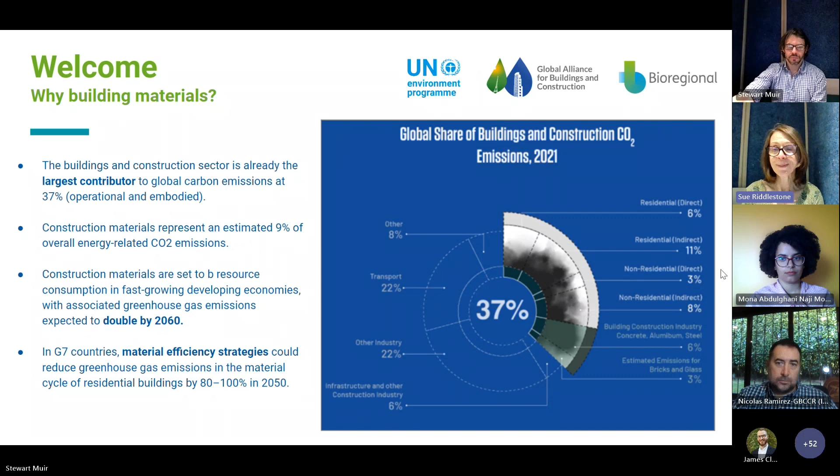Next slide, please. We have all been doing a brilliant job at tackling operational carbon emissions - that's the energy we use to heat and light our buildings - but we haven't addressed embodied emissions of materials fast enough. You can see this chart here from the Yale study - and Yale have been partners in this initiative - which shows 2021 on the left-hand side, and then by 2050 you can see that the embodied carbon of the materials, if we carry on as we are, will make up a much larger proportion of the carbon emissions of the buildings and building sector.

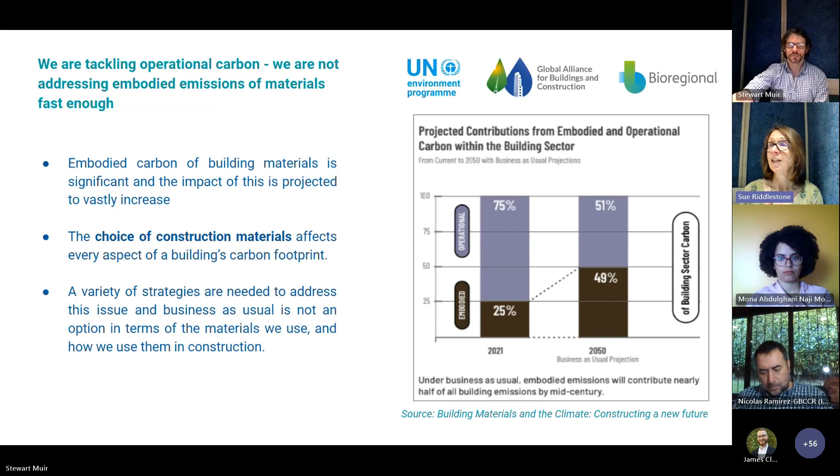So this is something we urgently need to take action on, because the choice of construction materials affects every aspect of the building's carbon footprint. But we also need to think about resource consumption. You can see from this chart here from the OECD that construction materials dominate resource consumption.

You can see at the top there, sand, gravel and crushed rock, the steel, the metals we use to build our buildings, limestone in terms of that's needed to make cement, wood. So you can see that the construction industry - and if you think about it, if you look around you as we go about our days - basically, yeah, it's buildings, it's where all the material is. So this is really a very, very important issue.

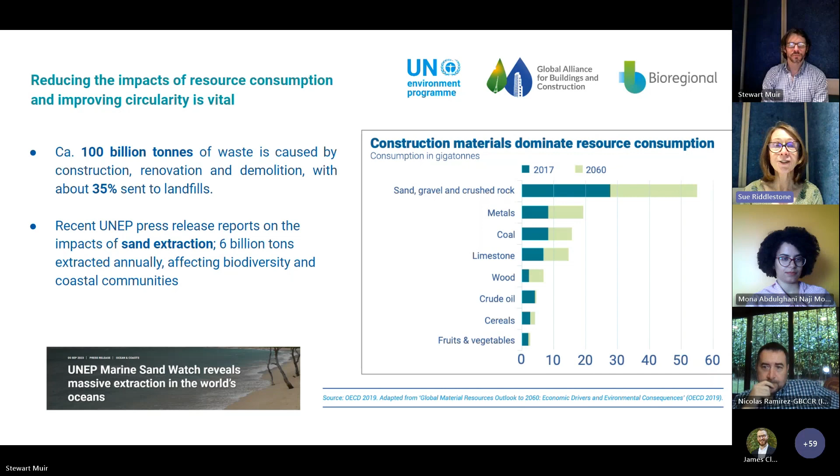And so we're delighted to welcome you all here today to talk about this, because - next slide, please - this is a challenge for policymakers, and the hub is very much dedicated to providing solutions for policymakers. So 50% of the buildings that will be standing in 2060 have not yet been built. So this is a fantastic opportunity to do it better, to improve the circularity in terms of resource use in the buildings, the embodied impact of the carbon.

And you can see from this chart here how what we need is to reduce the high embodied non-renewable materials, in grey there, in terms of building materials, and grow more use of timber, recycled materials and bio-based materials.

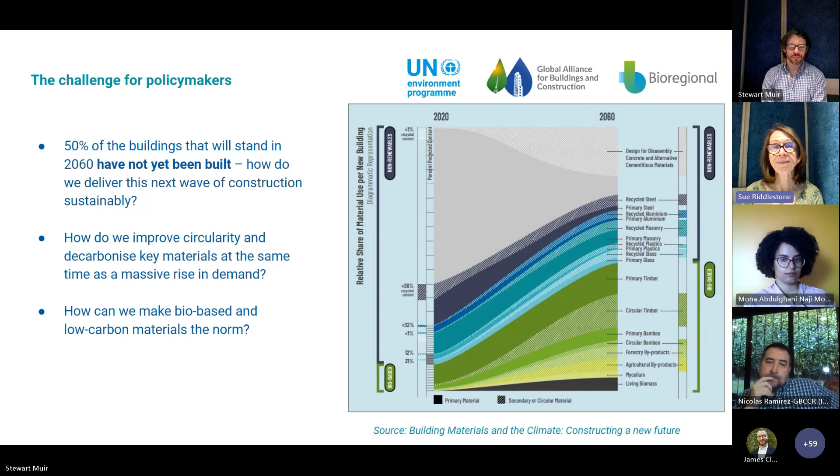So I'm delighted, having told you all about the imperative there, to hand over to Mona Mohammed from United Nations Environment Programme, who is the Programme Manager of the Life Cycle Initiative based in Paris, France. She has been chair of the Materials Working Group on this project. Mona works on increasing access to life cycle assessment data and knowledge, and works closely with the building, construction and mining sectors. Mona's background is in environmental engineering and women and gender studies. Before joining the UN, Mona worked as a WASH advisor - water and sanitation - supporting the humanitarian response in Yemen and Sudan. So over to you, Mona, to share with us a little bit more about the background to the hub and its purpose.

Thank you. Thank you, Sue.

Really happy to be here today and to finally be launching the Materials Hub, which has been long in the making. So really glad to see quite a lot of people here from the GlobalABC and from the Materials Working Group, and I'm just thrilled that we're finally here today.

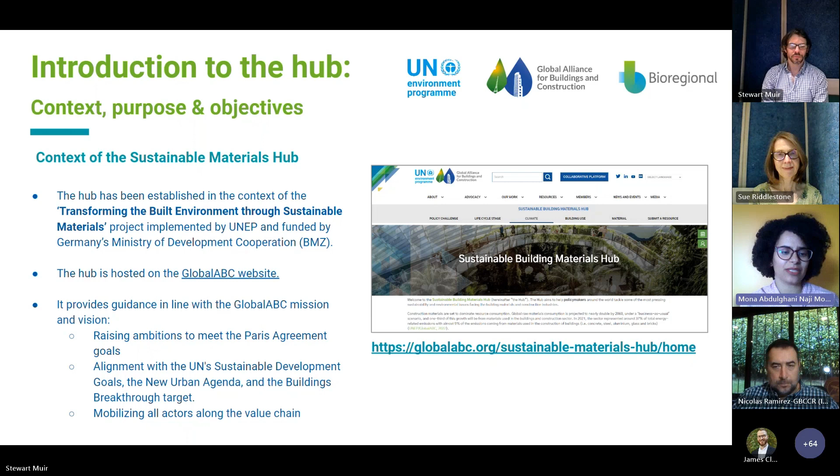We recognize that we have a lot of partners across the globe who work on this and put in a lot of work and resources. The idea was to bring all of that together into one platform where different users, and specifically policymakers, are able to come and access these resources. This is in line with the GlobalABC's mission and meeting the Paris Agreement goals, and finally the alignment on the UN Sustainable Development Goals.

The primary target audience here are policymakers, but we do work with everybody along the value chain of buildings and construction. So we have resources also for academia, civil society, private sector, etc.

The hub really is looking at different geographical contexts, and so we've tried to categorize the different resources by different geographical locations, as well as making sure that we're bringing everybody together - we're not reinventing the wheel. The main background pages of the hub, as well as the different pages of the hub, have built a lot on the text that has been developed by colleagues in the Yale Center for Ecosystems in Architecture.

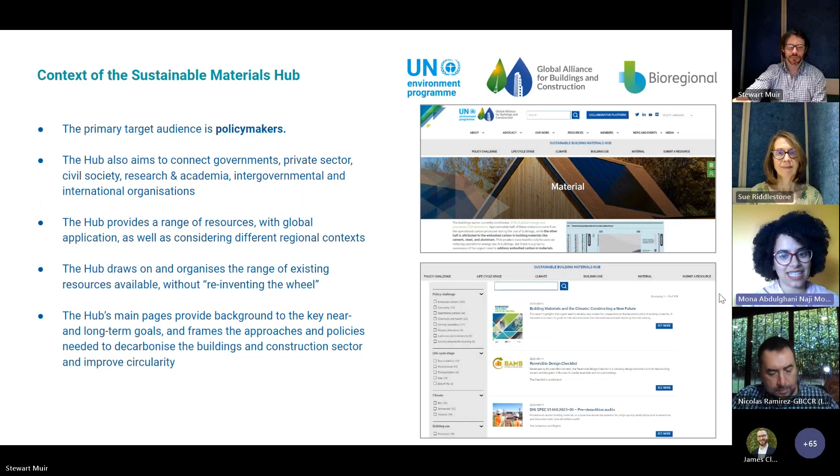A lot of the work we did, a lot of the language on the hub, actually comes from this materials report, which was launched yesterday. This report looked at the state of play all over the world, but especially focused on the 4 countries mentioned previously, with deep dive case studies. It really focused on the state of play for the climate and resource consumption impacts of buildings and construction. From there, the report also looked at setting out a roadmap for decarbonization profiles by looking at different building materials and what the transition to new materials might look like.

I really like the slide and the graph that Sue used, because it has an image of where we start today in terms of the mix of different materials we use in buildings and construction, and where we should be in 2060 if we want to continue to decarbonize the sector.

The report also looked at different profiles of technological advances and new business models for the buildings and construction sector, as well as introducing emerging tools for data analysis and decision making. So all of this was quite useful for the Materials Hub and for us as background material as we were putting together the information in the Materials Hub.

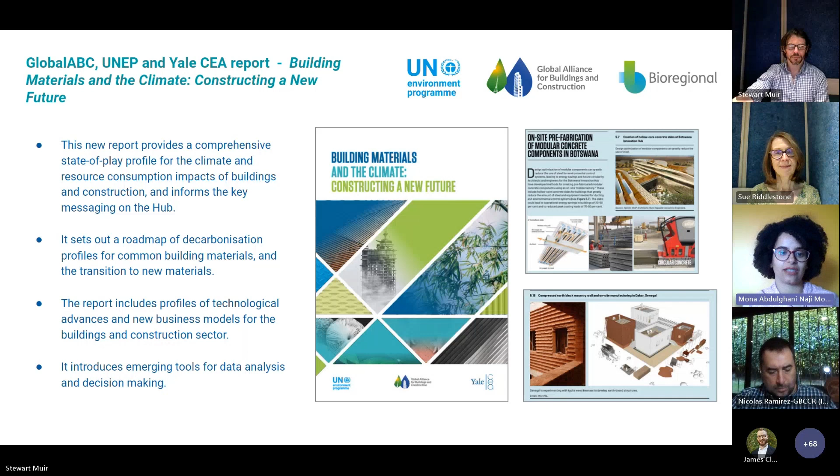On the next slide, we'll take a deeper dive into maybe 2 key messages from the report, as well as 2 objectives of the Sustainable Materials Hub. First, the hub promotes a whole life cycle approach, which was also quite an important key message in the report, where the impacts of material choices on human health and well-being, climate and ecosystems have to be considered before these materials are even extracted, and then again at each phase of the building life cycle, from extraction to processing, installation, use, and demolition.

And then for all of this, it's really important to have access to reliable information, verification, and coordination across the different stakeholders in the sector. That would include manufacturers, architects, engineers, builders, and recyclers. That is what the hub, in a way, was also hoping to achieve by bringing the different resources together.

The 3 strategies that the hub tries to push forward are the Avoid, Shift, Improve framework published by PEEB. There we're looking to avoid building, or building with less when possible, through designing better. That would include considering local value chains, not building, or reconceptualizing our use of buildings before we actually decide whether or not to build new buildings.

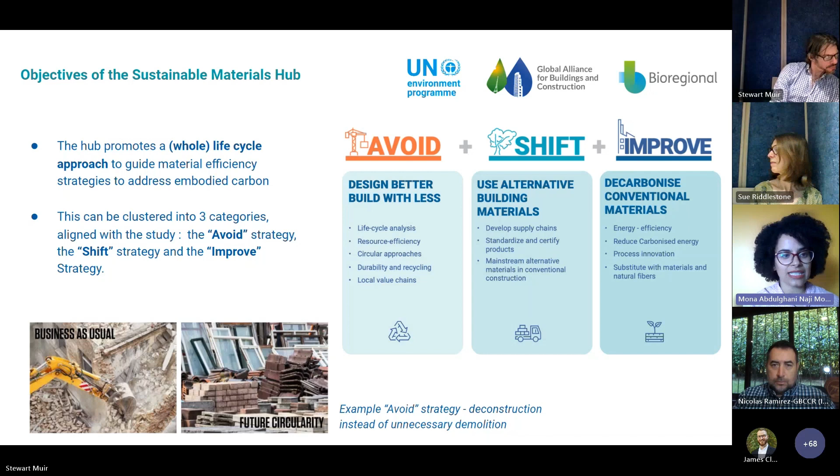So this was the objectives of the hub. On the next slide, you see we're moving on to the consultation process. And this has been a long process.

We started in late 2021 with a global stakeholder group where Bioregional started the first consultation and drafted an initial paper as to what might be useful in this hub. Then from there, we started the work in June 2022, scoping the first iteration of the hub and building the map of the hub.

And then we continued, and that was also around the same time that the GlobalABC launched the Sustainable Materials Working Group, which provided a sounding board to Bioregional as this work kept on developing. The working group included members from the global building councils, different associations and NGOs, industry, universities, architects, tool developers, and material certification programs. So we really tried to have as wide a reach as possible.

And how can we make this information available as easily as possible in terms of the taxonomies used and the resource categorization? The second part of this discussion focused on the continuation of this hub and ensuring that it continues to stay relevant. So conversations about updating the content on a regular basis and encouraging input from people outside the group to provide their reports into the hub is also one thing we discussed, as well as what would the governance and maintenance of the hub look like moving forward.

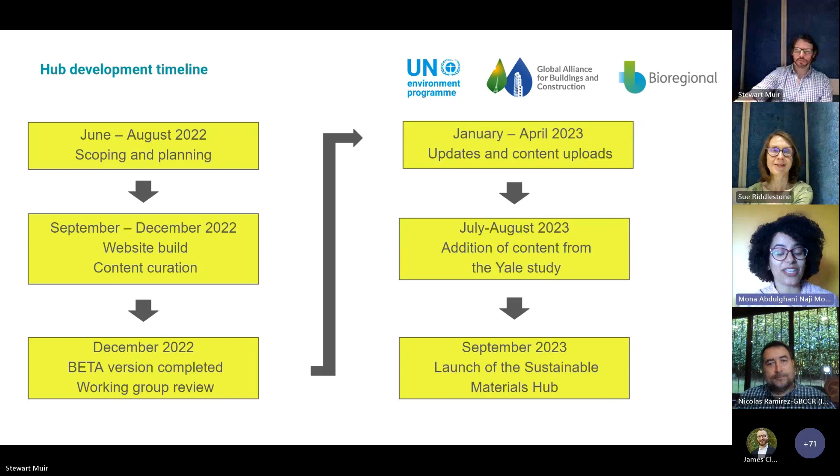So on the next slide, there's a bit more detail on the timeline that we had, looking at the different phases we looked at, but most important, we started in 2022. We had a beta version by December 2022, and then we were able to add all the content from the Yale study in the last couple of months, and we are finally launching today. So this has been a long time coming, and we're happy we're finally here.

And finally, on the last slide, the next steps for the hub. So of course, we continue with the Sustainable Materials Working Group, which supported the development of this hub and will continue to support it and upload different resources, and the governance of the hub will come from the Sustainable Materials Working Group. So if this is a group of interest to you, please feel free to reach out and we'll be happy to add you to our mailing list and to the different working groups.

And then, of course, we'll continue to scour the internet and do regular reviews to ensure that if there are any relevant resources, we're adding them. Finally, as this is a project that's been supported by BMZ, and as the project continues to develop in the different 4 countries and is being implemented by UNEP in collaboration with UNOPS and UN Habitat, we will continue to populate the hub with other resources as these become available. We really hope this will be used by different countries as they're developing their NDCs, nationally determined contributions. But yeah, thank you for being here and thanks for having this moment to talk about that.

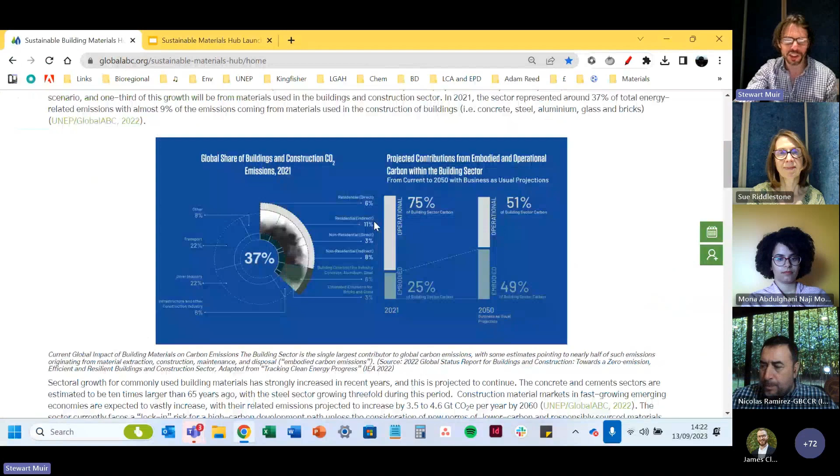So just to show you quickly how the hub looks, here's our main homepage. Our policy challenge page has some background information and links to these topics on the menu on the left.

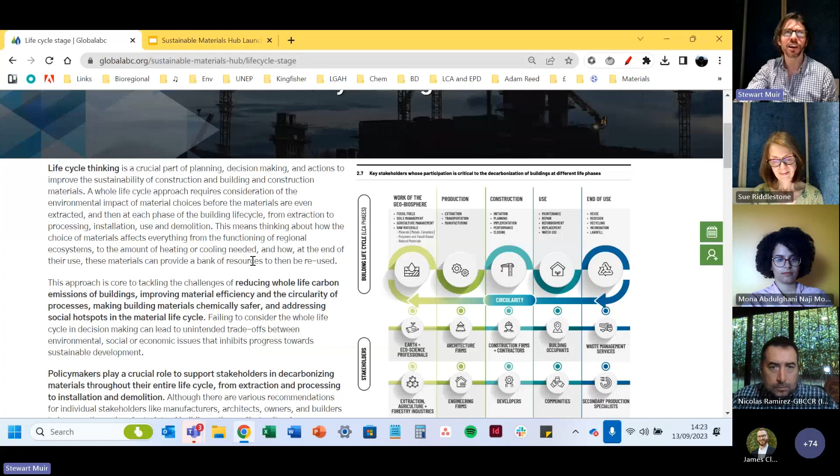So embodied carbon and circularity are 2 main pillars of what we're looking to address with the resources, but some of these resources also look at things like operational carbon, chemicals and health, climate adaptation, socially responsible sourcing, and topics such as that. Life cycle stage is looking to feature resources that encourage the use of this whole approach or tool to enable full life cycle thinking to be used across procurement as well as assessing environmental impacts.

For the way we've split resources on climate, we've decided to use a dry, temperate and tropical split for the different building types. We did consider how many country types or regions we could divide materials by, but we decided in our consultations to keep the classification of these 3 climate types, and we've gone with the Köppen-Geiger climate classification for this.

For building use, again we include some background here, and we're looking to cover areas related to municipal construction that might relate to sustainable public procurement, commercial buildings, some resources related to infrastructure, residential buildings, and social housing and informal settlements. Informal settlements are a very important aspect of the hub's resources, as there are 1 billion people in the world at the moment living in what would be described as the informal housing sector.

And then finally, materials - this is our final main page. Again, we break down some key strategies here on non-renewable materials and also renewable materials, for example bamboo, timber and wood, obviously gaining traction as construction materials. We thought this would be a fairly key entry point for users of the hub.

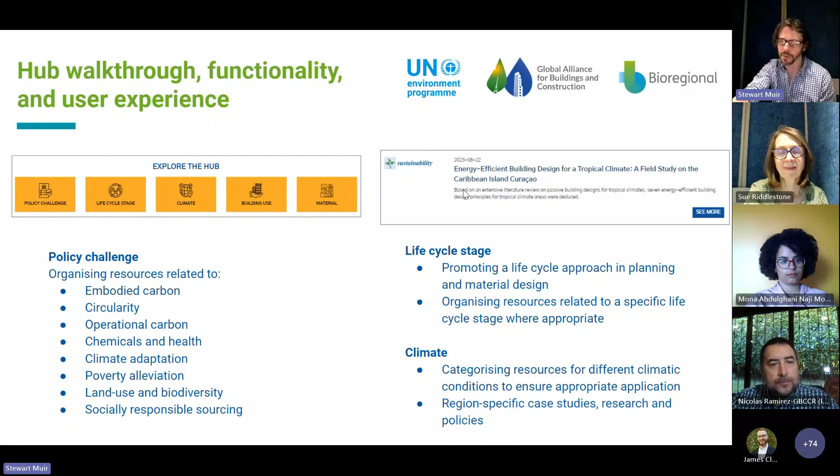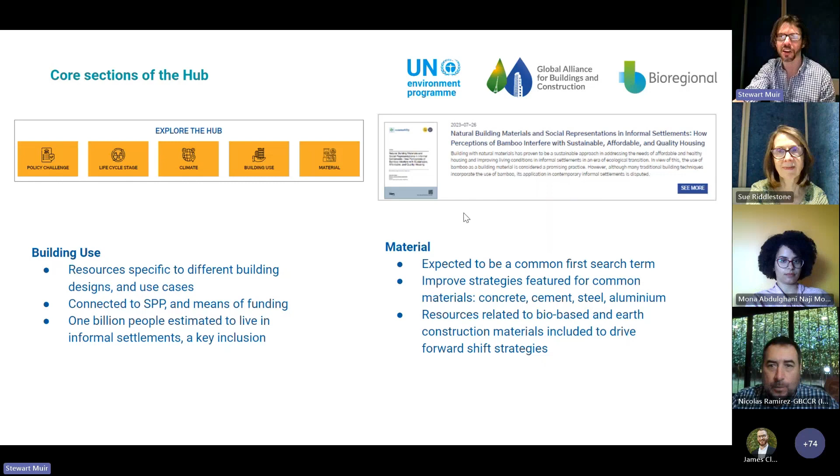So we have resources of different types - for example, a number of research papers and policy briefs. Here's an example of one of our papers on natural building materials and the social perceptions of bamboo compared to how other building materials like steel might be perceived, in terms of performance but also how they're perceived socially as materials.

In terms of the different resource types, in our consultation we did take on board that it would be useful for people to have menus and filters around the different types of resource.

So we have a number of tools on here. There's an array of tools that we've come across and been suggested to us by working group members and other people who have fed into the hub. So we have tools such as the Building Transparency EC3 tool, which is on here. We have some carbon calculator tools of varying simplicity and complexity on the hub, which have different applications and different geographies where they're intended to be used.

I think one thing we really hope to see in the next few years is replication of tools and seeing more free access tools become available, but also finding ways to find a tool that works really well in one place and find ways that it can be replicated in other places.

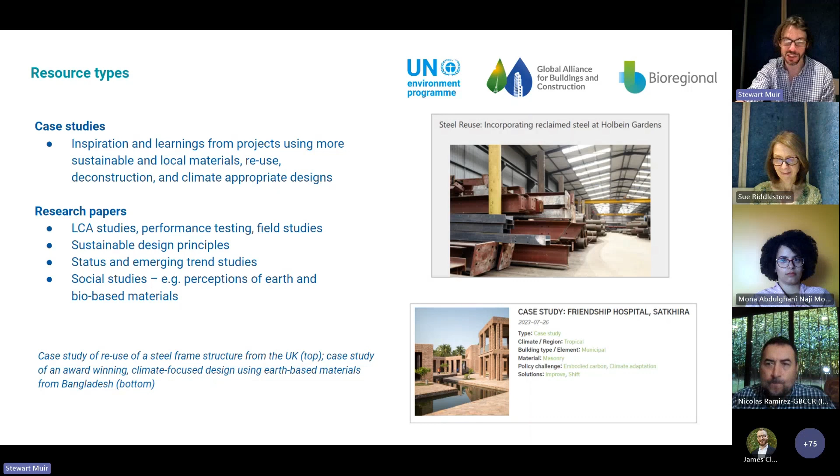Sustainable design principles is another thing that we've included as well. The architecture community is very key to this, the community of sustainable building materials, and they're a very big driver of action at their position in the value chain. And also the social aspects, again, is something that we've attempted to include research papers on, and perceptions and the uptake of certain building materials, and what some of the emerging trends are going forward in terms of the perceptions of building users, emerging trends in technologies, or emerging trends in new business models.

So I'll just briefly go through a few of the sort of user journeys of the hub, because we did quite a lot of user testing of this, and things like how many filters do we think is useful, and where do people start, and how do we want to split things up.

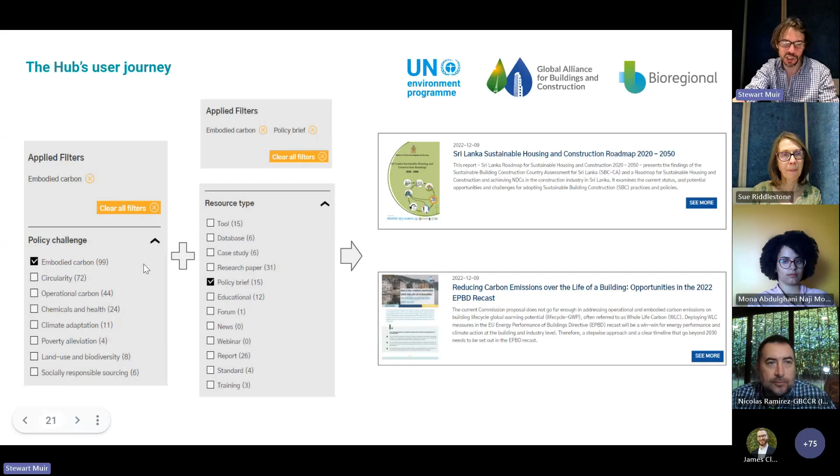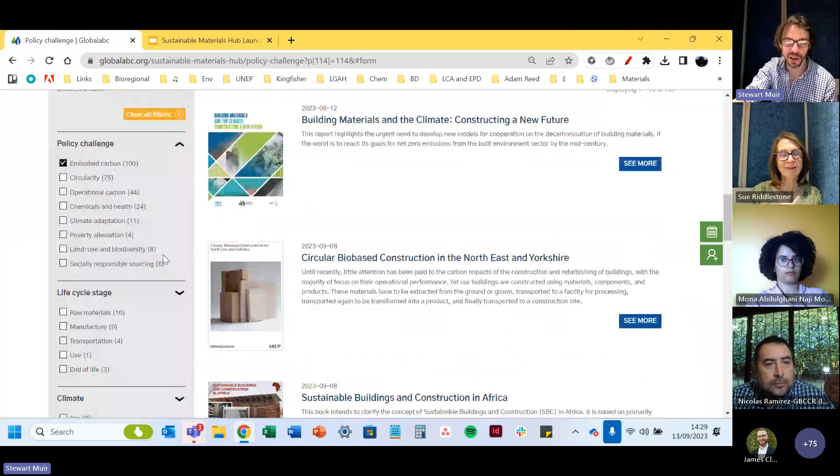So, for example, we've got lots of resources on embodied carbon, and we've split a number of these up. To come back to a user journey here, if you were to start with the policy challenge page, we think this might be a first port of call for a number of users. So if you are interested in resources on embodied carbon, we've got quite a few on there, but this could be cut down to different areas.

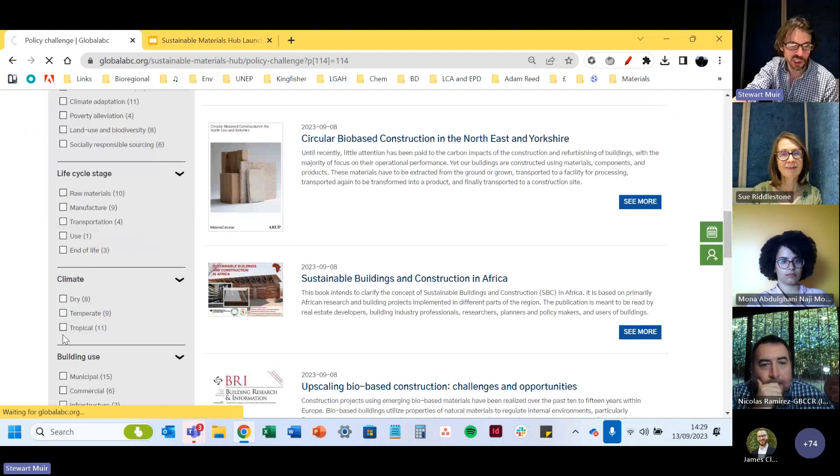For example, if we were to split by tool here, we've got a number of tools such as OpenLCA or Athena or Tally, other tools such as the UNEP Eco Innovation Manual, which is a sort of tool in a different sense. Various policy briefs on embodied carbon again.

So if we filter by this, some resources get very much into looking at embodied carbon policies and the assessment of these. In terms of research papers, again, we have an initial set of these, but how these would enable policy development. So things like this paper from One Click LCA on carbon footprint limits for common building types.

Materials we know would be an initial first port of call, so you can clear all these filters here and go in via materials.

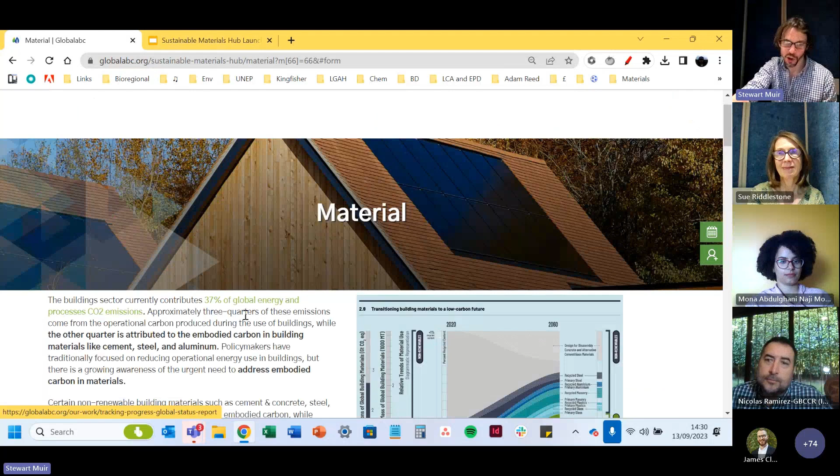So one of the discussions we had, we've just got an initial set of resources here. There certainly will be more going forward, but if you're interested in cement and concrete, we've included some global resources on cement and concrete, but also some things that may be useful if you're looking for alternatives, like the LC3 project and some of the outputs from that on limestone calcined clay cements.

For example, if you're looking for research papers, as we've split up here, we know there's lots of good research papers on things like the MIT Concrete Sustainability Hub. If you go into resources here, you can see we've tagged them with the avoid, shift, improve solutions, so you can find them there.

This is a paper you can get to. This was a study by Jane Anderson and Alice Moncaster, which assessed all the data that there was from EPDs of concrete. So this is a very vast data source that could be useful in designing policy around concrete.

We've got some other options if you wanted to go in via a material and look at things to do with, say, steel. We've got a variety of resources on steel, so various tools for steel, things like the innovative steel reuse toolkit for reusing steel, and data sources like the global steel plant tracker to work out different techniques being used in steel making.

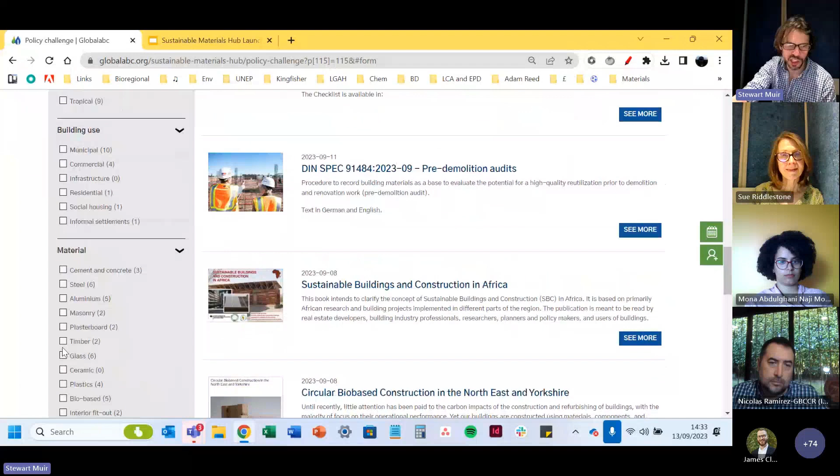If you were to go in via circularity, say, as a first port of call, you can come back to the policy challenge page here. For circularity, we have quite a lot of resources already, but if you wanted to go in via tools, you could find things like the reversible design checklist from the Buildings as Material Banks project, various other circularity tools, research papers and policy briefs on circularity.

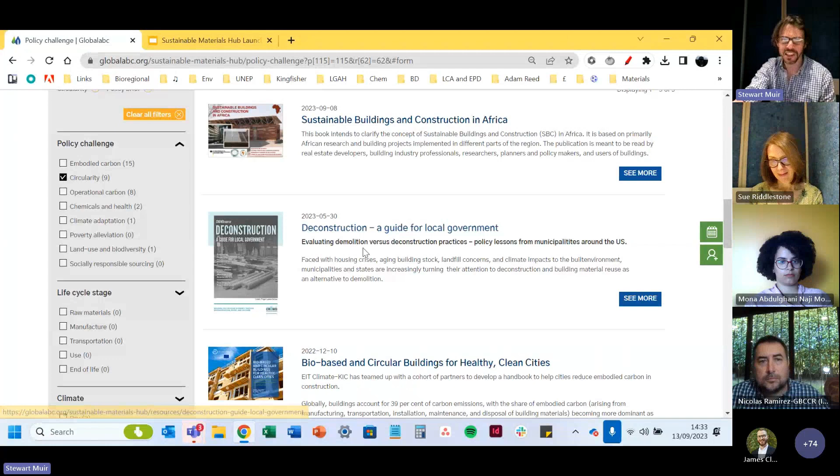If you were to cut material resources in this way, there's various material resources on good use of circularity practices in sustainable buildings and construction in Africa. We have things like the Deconstruction guide, looking at demolition versus deconstruction practices, policy lessons from a number of municipalities around the USA, and different roadmaps, the global perspective on policy briefs for circularity.

One example here was the policy briefing on biobased and circular buildings from EIT Climate-KIC. This has a number of key policy recommendations in here.

One more useful example to show would be on building use again. This is one area you might start if you're interested in resources on informal settlements. We've started with some resources here on case studies looking at particular informal settlements.

We have some more material-based resources on here, or you might want to go into something like municipal construction and connect to sustainable public procurement type policies. We've tried to make it so you could get to a good amount of resources within a couple of filters, but you could use more if you wanted to.

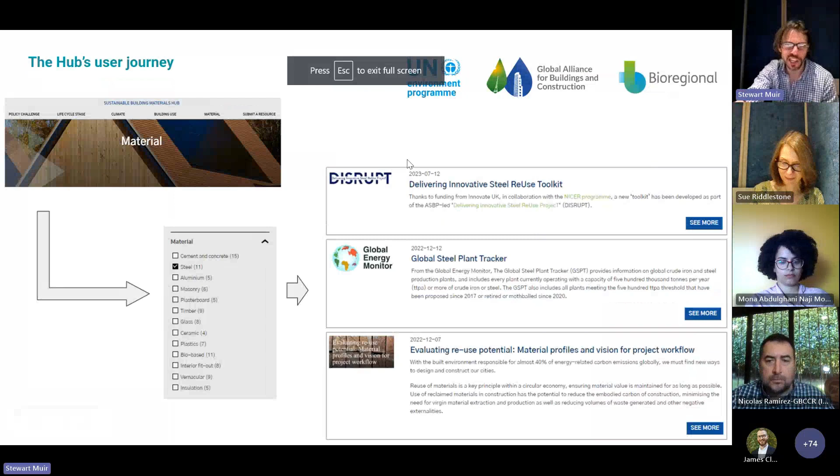So those are some early stage user journeys. Just to show on here, we have some resources if you wanted to be more regional specific.

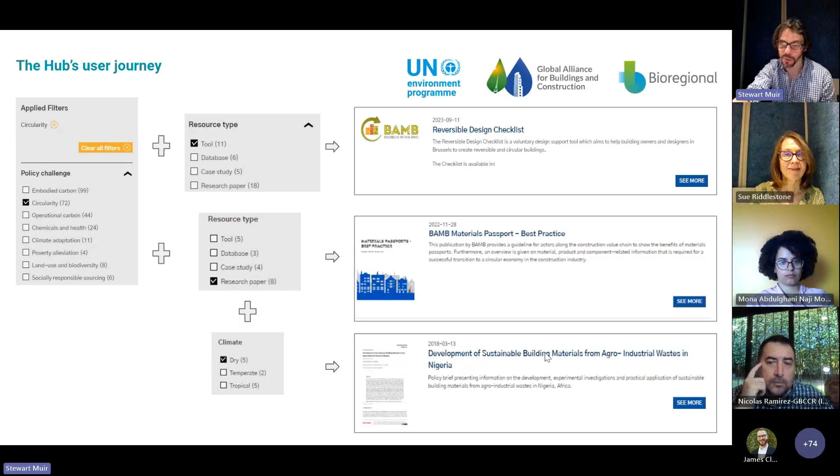For example, if you're looking at circularity resources and you wanted to go from research papers, you could add another filter in for different climates and try to find good resources from, say, a dry climate. So we have a circular materials report here from Nigeria.

We've populated about 200 resources at the start, and this has been through consultation with the materials group, and we are aiming to further expand the resources on the hub. We have proposed an internal review process to make sure these are impartial, good quality peer-reviewed resources. It would be very good to see an increase of free-to-access tools on the hub that can be used globally, and you don't have to be a member of the GlobalABC to submit a resource. We have the submit a resource page on the hub here, which enables anyone to put their resource forward, and it can then be reviewed for inclusion.

The Hub is aiming to support some of these approaches, and just to give a few examples of some very positive action that's been seen going forward. There is obviously a lot to do on sustainable materials, but in terms of bio-based materials, we featured some resources on the use of Typhaboard, which is a very interesting material made from the cattail plant with very good thermal properties and contributes to management of that plant.

With the LC3 projects, that's been something we've seen some really interesting strides on recently, with this being featured in the building code of India.

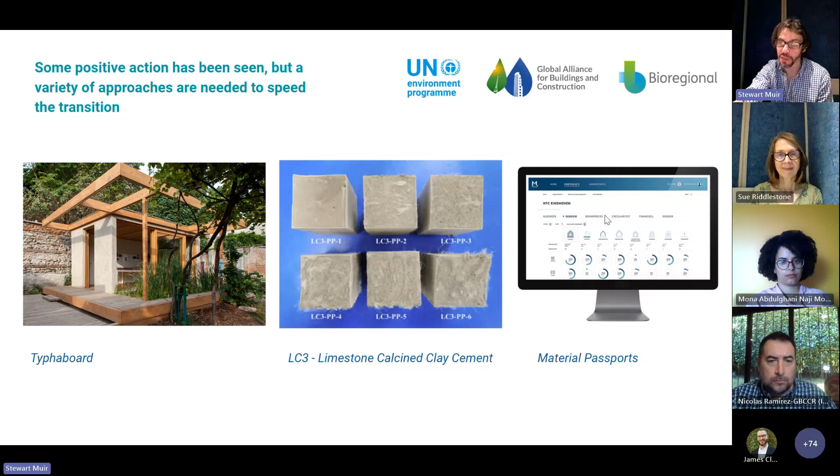And things like material passports, the hub will be looking to give profiles of good data solutions. Material passports is one area we've seen moving forward in Chile. There's one being released there, and this is the Madaster programme, which has just been released in the UK.

So in terms of policies, we're very interested in things that will enable a good amount of data on different building types. We've seen some really good policies moving towards building codes in a number of countries, but there's still lots of building codes that don't have anything on embodied carbon in them yet. So we'd be keen that the hub can support that type of policy development.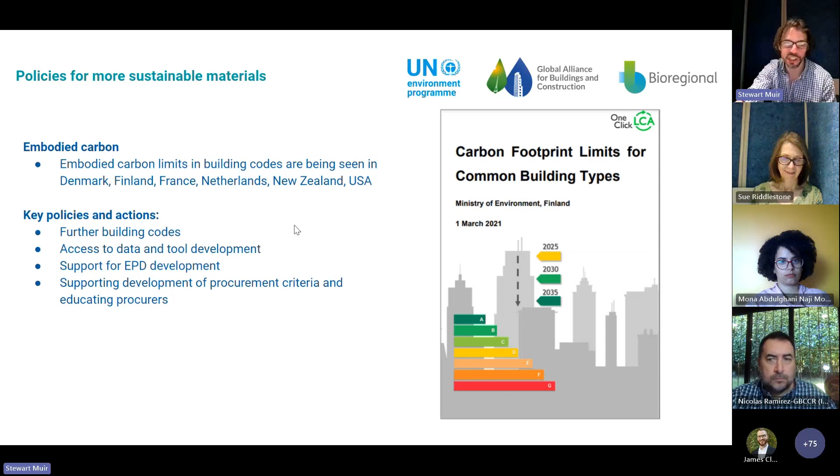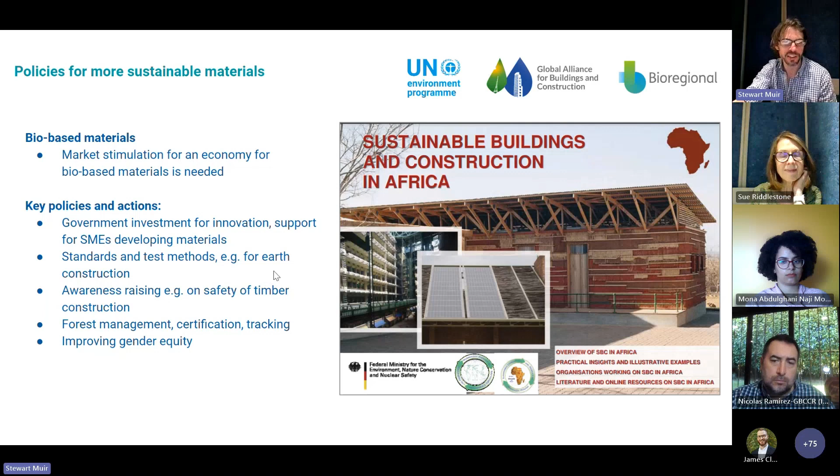Bio-based materials is certainly one area the hub is looking to support by showcasing some really good examples, which is the case in this online book here. But also showcasing things like standards and test methods for earth construction and bamboo construction, and raising awareness on other aspects of these materials so they can be used well going forward.

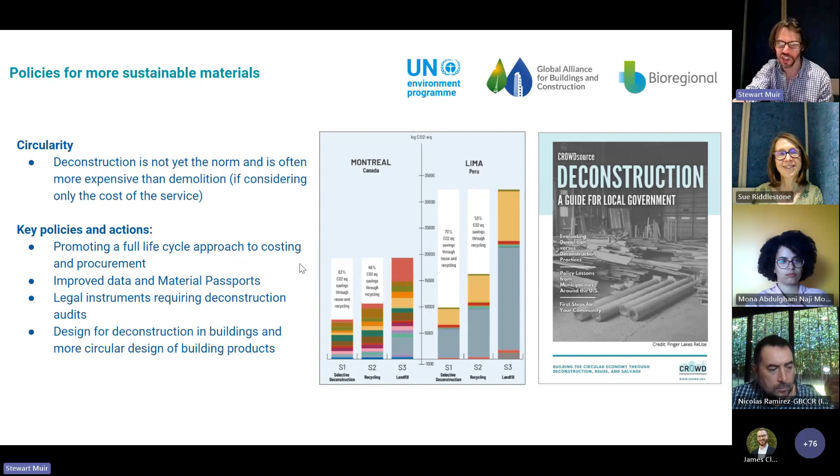So hopefully this is something - I think deconstruction is a very exciting area that is near the start of its journey, but something the hub is looking to advise on.

So it's the end of the hub tour.

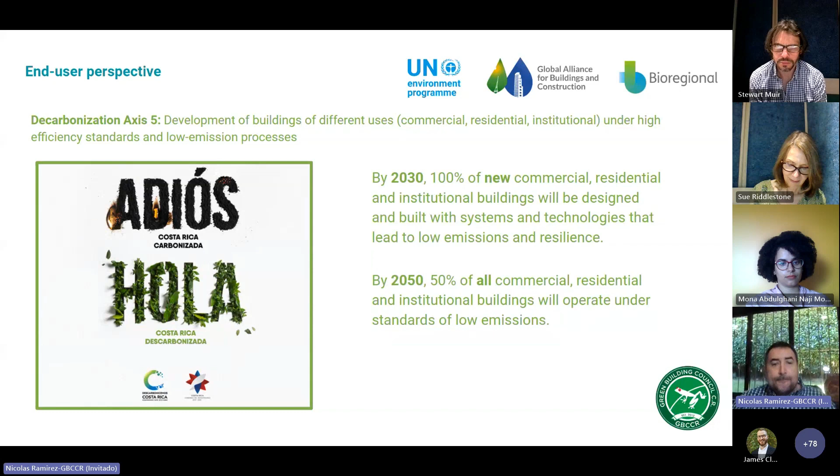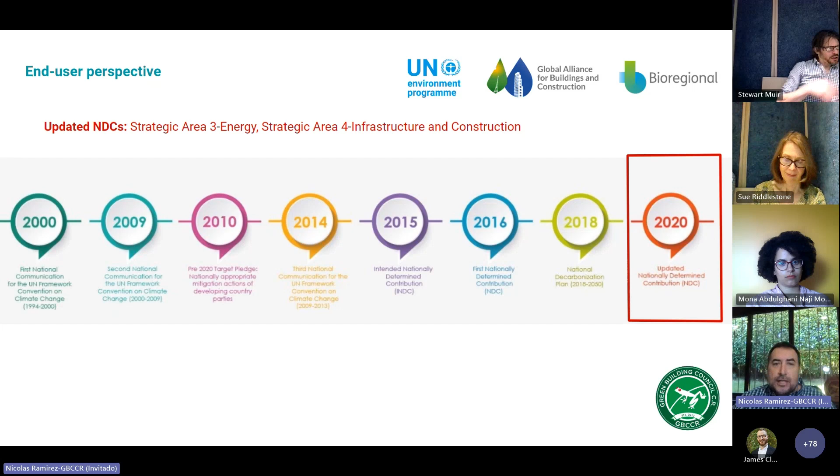There's also the NDCs. We had some preliminary NDCs back in 2016, but the updated ones were published at the end of 2020, and these were much more specific and focused, with strong focus on cities, buildings, and the built environment as a whole. Three of the ten strategic areas involve buildings. The main ones are Area 3, energy, and Area 4, infrastructure and construction. This is important because here we start to see much more specific implementation, bringing things down to metrics and actual numbers of what we need to do as a country.

So we think it makes quite a bit of sense to have tools like the Materials Hub. But we think the Materials Hub can be useful not only for the technical ideas of the materials themselves, but also as examples of policy making. For example, here in Costa Rica, when we're talking about locally sourced, locally produced, and locally harvested materials, what we're a bit concerned about is how this will affect small and medium enterprises.

We're looking for local materials. Costa Rica, in general terms, has a tradition of importing a lot of its construction materials. We don't produce steel here, for example. We don't produce glass and several others. So the sector as a whole is very accustomed to importing lots of materials. We're hoping that with tools like the Materials Hub, we can get some peer-to-peer learning happening for policymakers, see what's happening in other places, and see how these transitions can be made in a way that we're not leaving behind and we're actually supporting small and medium local enterprises.

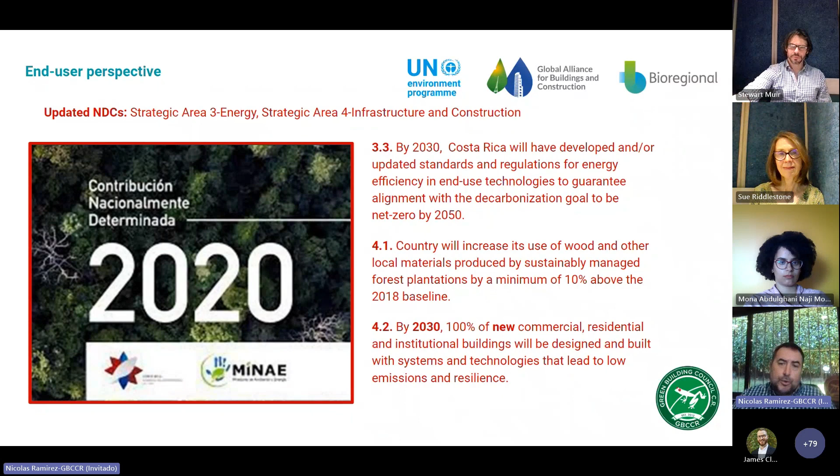Costa Rica is very susceptible to extreme climate events, so resilience has been an increasingly important issue for us.

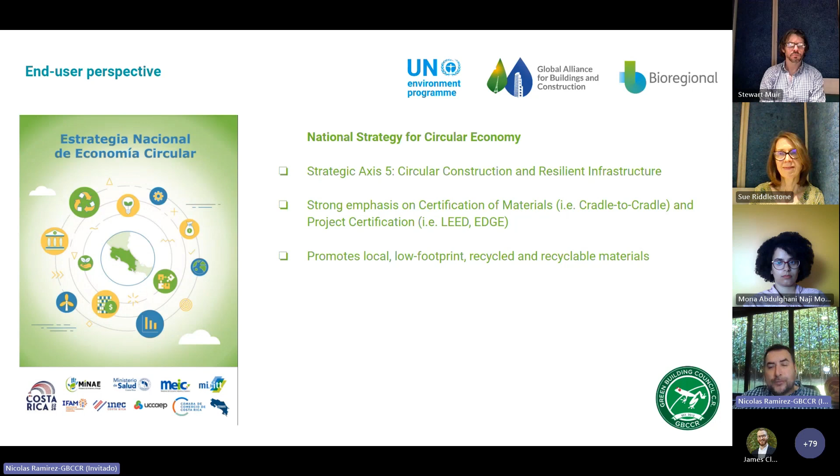Another solid example of how this can be used is the GEF8 IP11 project, which is eliminating hazardous chemicals from construction supply chains. This is being implemented in Costa Rica right now. There's an initial 4-year plan, and right now we're in the pre-implementation phases. This will require a national baseline of hazardous chemicals that are actually present right now in our built environment.

Right now in Costa Rica, as in many developing countries, we don't have an existing baseline of this. We don't know exactly what the volume, quantity, or even what types of hazardous chemicals exist presently in our built environment. We have a pretty good idea that there's a lot of asbestos-based materials out there, and a lot of materials that use different kinds of POPs, persistent organic pollutants, which have more recently been banned and not produced, but we know they're present in our environment.

Resources like the Materials Hub, we're hoping, can help us along the way to get a better idea of what different methodologies or policies have been used to understand what is existing within the built environment, and hopefully use that in the process of our project, which will include regulation to prohibit the importing of hazardous chemicals and regulate substitutions, to promote adequate alternatives, how that can be implemented, and what strategies can be used for that.

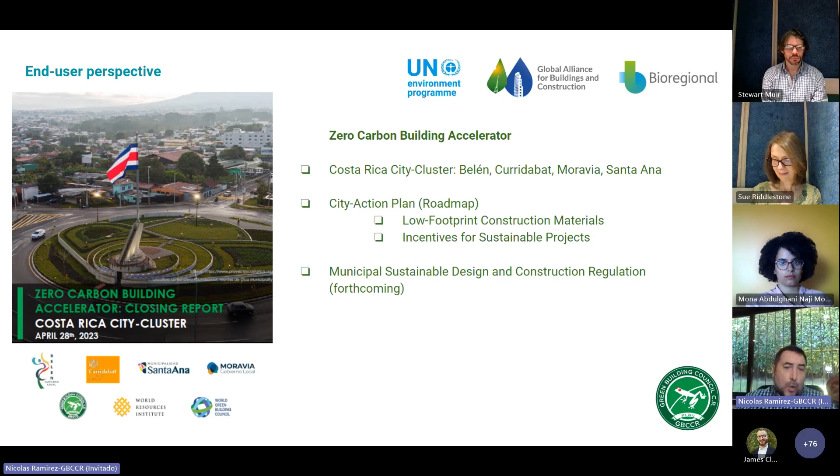Wrapping up, it's important to mention how this can support sustainable public procurement and eco-labeling initiatives. Costa Rica has been moving forward on this at a very good pace. Just recently, at the end of 2022, the Sustainable Public Procurement regulation was updated to include a much broader and stricter mandatory use of this regulation. Before, some of the bigger government buyers were not using it; now they all have to. So we're going to see a much broader implementation, which we hope will result in greater impact. For procurement processes, there will be additional credit in government projects for those using materials with certain certifications or third-party verified technical data.

It's worth mentioning that this aligns very well with other initiatives within the country focused on eco-labeling and promoting the use of EPDs, or DAPs as they're called in Spanish.

Mona mentioned in a part of the Materials Hub another important use for this: national taxonomies. Costa Rica is just starting its national taxonomy for sustainable finances, and the GBC has been named the sectorial leader for construction for that policy. We're expecting to depend heavily on the Materials Hub for examples of how policy can be formulated to promote financial or tax incentives for when sustainable materials are used, not only at government level but at other levels as well. That's the idea here.